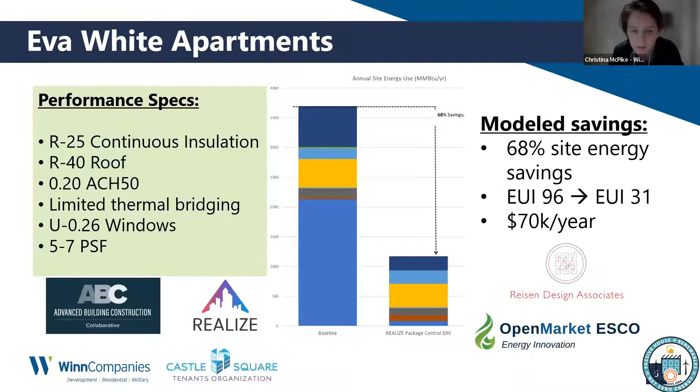This is Peterson Engineering, and all of our new distribution systems, i.e. the supply ductwork off of the ERVs and the refrigerant lines from the central VRF plant, we're going to drape over the existing face of the building and punch through the T's of the T-shaped windows, where they'll connect to new fan coil units inside the apartments and provide distributed fresh air through the central ERV systems up on the roof.

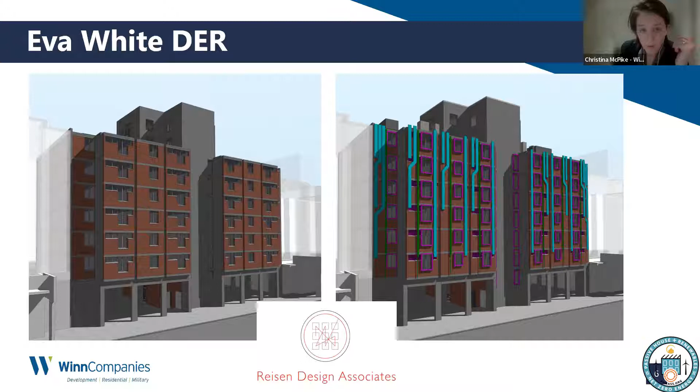So once all of this HVAC distribution is installed, we'll start hanging our panels. We selected a manufacturer called, that everyone will be familiar with, Tremco, of the Dryvit brand. This feels and kind of looks like EIFS.

These will be 8 foot tall by 13 foot wide, prefabbed panels fabricated in a shop in Indiana, shipped to the building, and mechanically fastened to the facade at the conveniently exposed concrete floor slabs on each level. And so that's going to completely enclose that mechanical distribution network behind it.

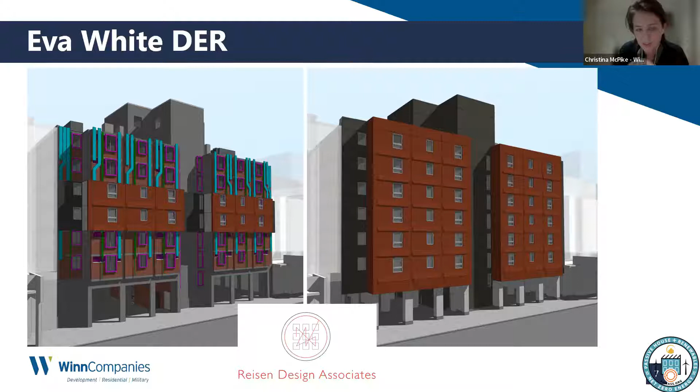The little pink boxes represent our fire stopping detail at the window openings. We'll also, just based on ISD and BFD feedback, be fire stopping at each floor slab as well to compartmentalize flame spread.

But a little bit more detail here, and we're a little further along in developing drawings. Like I said, we're working with Tremco. This is a new product that they've been working through R&D of for the last year or so. It's called the Revitalite system.

Our panel will be 6 inches thick. It has an internal framing system, and then it's basically coated with traditional EIFS finish. And like I said, mechanically fastened to the slab. The fastening system is a patent pending system, so I can't get into too many details on that.

The system itself, meaning the whole panel, the window within the panel, and even the panel-to-panel connection, it's important that we define it as a system — a system that is fully engineered and fully warranted as a system, rather than at a component level or as a kit of parts.

It's still going through performance testing. We do have the big one, which is NFPA 285, the fire test, but it is currently still going through air, water, and thermal testing, and some smaller fire testing, some little sisters of NFPA 285.

We're also having the very fun legalese conversations around warranty and insurance, which is all of our favorite parts of designing and constructing buildings. But when we're in the territory of hanging 800-pound panels on Tremont Street, it's a pretty important topic.

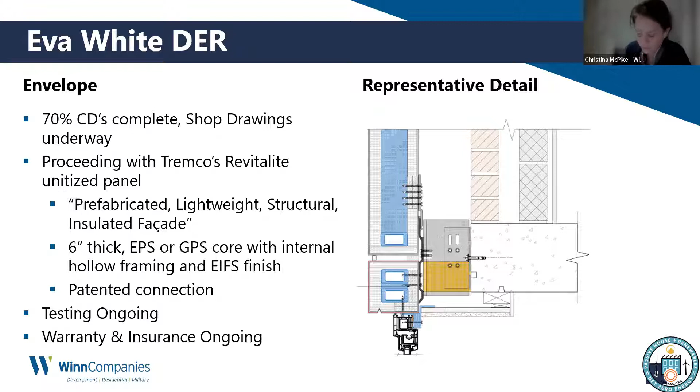HVAC I touched on, where it's all central systems now and master metered, with the exception of air conditioning, which is tenant-owned and provided window units. But it is master metered, including for electricity, which is pretty common in public housing. And that was important to maintain. So we had no intention of pushing utility costs onto residents, and for a variety of reasons, decided to stick with central systems.

So we have a central VRF plant, ERVs providing fresh air to every living room and bedroom.

We're able to reuse the existing exhaust ductwork, which is great. It'll all be cleaned and aero sealed, and there's some damper requirements required here and there, and tied into the new central ERVs.

And we're electrifying the hot water plant. So this will probably be our first Mitsubishi QAHV heat pump water heater, although not the only one in design development, given all of our passive house projects are specifying that these days.

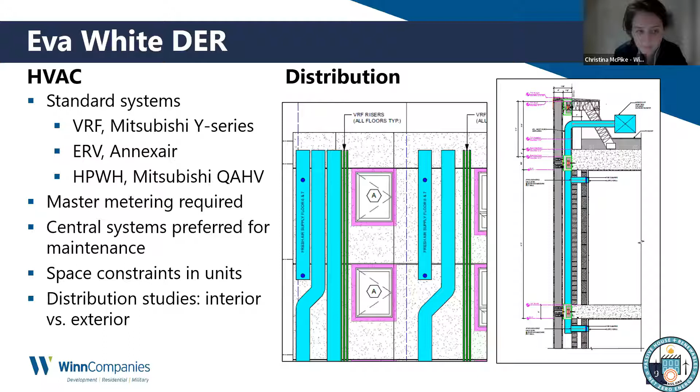The goal was always to keep residents in place, and we're planning on doing that. And in large part, that influenced the decision to stick with central systems.

It's an expensive retrofit. We're spending about $250K per unit. That's all in, meaning kitchens and bathrooms and non-energy work is included in that number. And it is a union project, but the deep energy retrofit cost alone is a little over $8 million. So it's not insignificant by any means, about $80K a unit.

We had to fill that gap with a variety of sources, but honestly, we were able to do that primarily with traditional housing subsidies, not necessarily special or new energy monies. That said, we did work hand in hand very closely with the LEAN program, with National Grid and Eversource, almost on a daily basis for 4 to 6 months, evaluating the project, the measures, evaluating our energy model, redoing our energy model, vetting our energy model, you name it. And the LEAN program is supporting the project with a significant incentive, which we're extremely grateful for.

For every extra dollar you spend on a LIHTC deal, the LIHTC equity goes up. So that's always a positive relationship.

And then most interestingly, because we're spending so much money, because the needs were so great at the building, which we could prove, we were able to qualify through a Section 18 path under the RAD program, which is in quotes, 'demolition and disposition of public housing.' This is a program that allows you to underwrite market rate rents in order to support larger and cheaper debt. And that's what we're able to do, and the deal can support it.

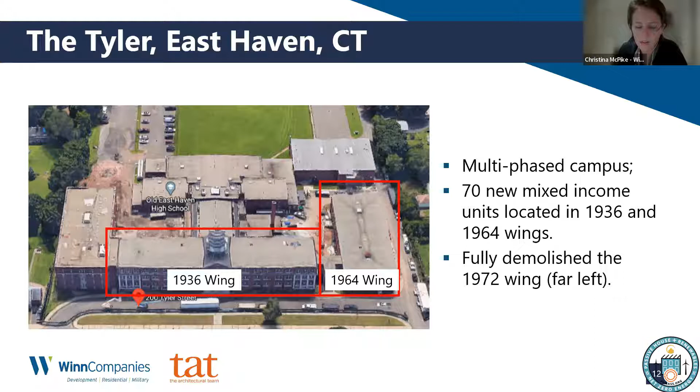We elected to pursue the EnerPHit program in direct response to Connecticut CHFA's QAP, which at the time had a total of 6 points, today it's 13 or 14. At the time it gave 3 points for Passive House; today it's 4 for Passive House, 3 more if you add LEED Platinum, another 3 if you're all electric with battery storage, and another 3 if you commit to commissioning, benchmarking, and broadband.

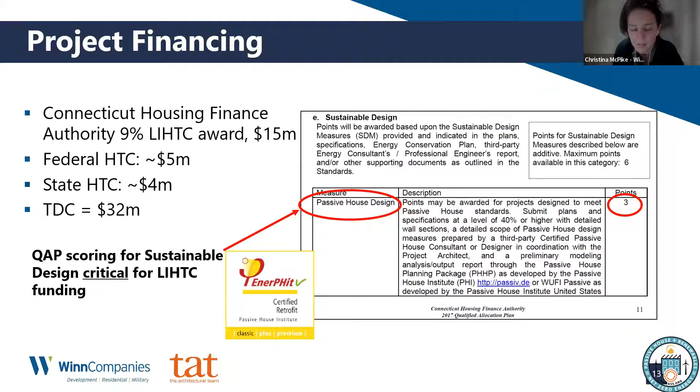But 5 years ago, this was the 2017 QAP, and we decided to propose EnerPHit as a compliance path. At the time we were kind of peeved, feeling these points would only be available for new construction projects and there's no way we could compete. But we had learned about the EnerPHit path, proposed it to CHFA, and they awarded us the points, which to this day we feel is the only reason the project got funded through the LIHTC program to begin with.

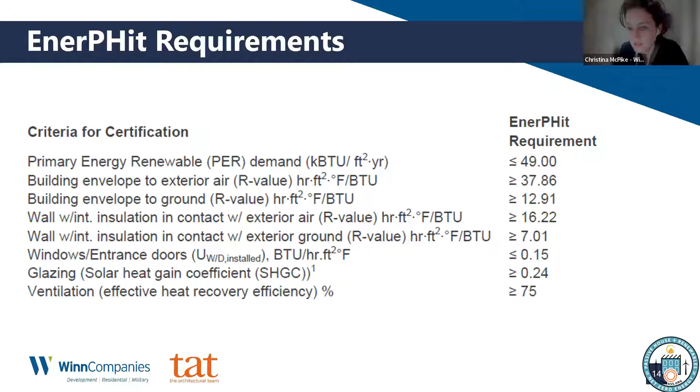So these are the EnerPHit performance requirements, not unlike PHIUS, although a little more forgiving. I want to admit these are from 2018, 2019 and may have changed. There's a maximum peak demand and infiltration requirements, plus some prescriptive requirements around ERV performance. So it's a mix of both performance and prescriptive requirements, and you can pick and choose your battles. Some are mandatory, no way around them, like the whole building blower door test results and the peak demand, but you can underperform with windows and walls as long as you still achieve the whole building energy demand.

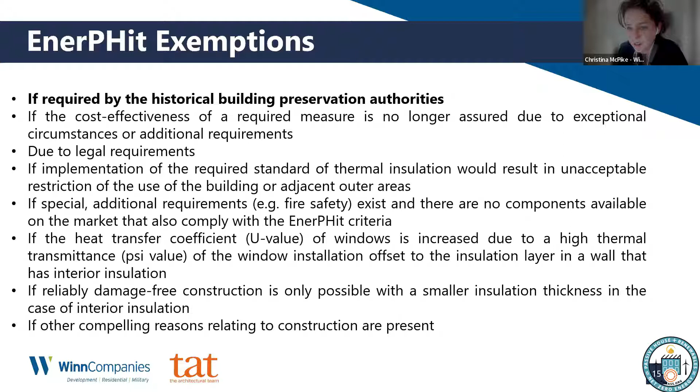EnerPHit is great as it has some specific exemptions. The first one bolded here applied to our project. They allow exemptions from those prescriptive requirements based on several factors, one of them being historic constraints, which we leaned on quite a bit.

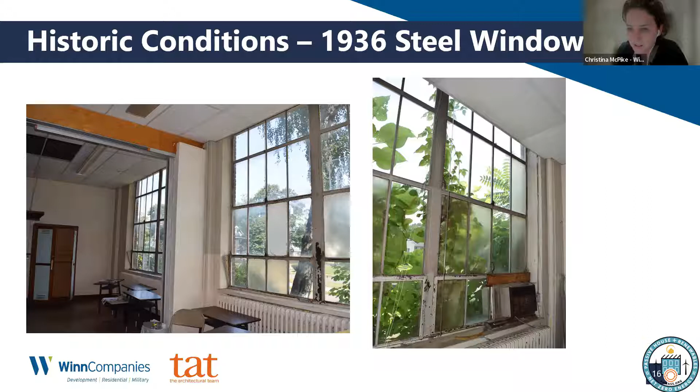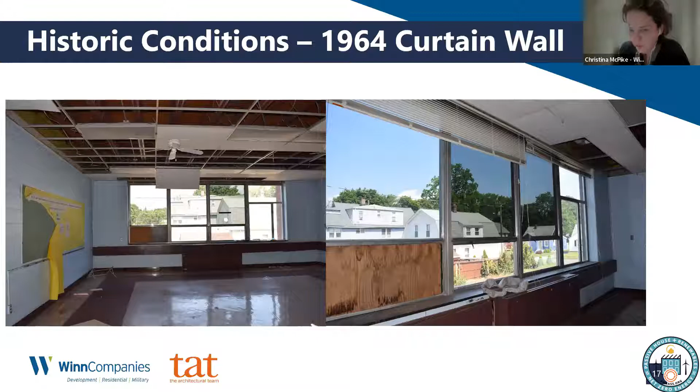Some photos here, this is in the 1936 wing. These are the original steel, single pane, really poor performing, massive windows, about 15 feet wide by 13 feet tall. In the 1964 wing are the historic curtain walls, yes they are technically historic, being over 50 years old. There really was not a lot of historic charm to preserve inside the building, the stairwells were about as far as the design aesthetic went, so we didn't have a lot to give SHPO, and whatever they could hold onto, sure heck bet they were going to.

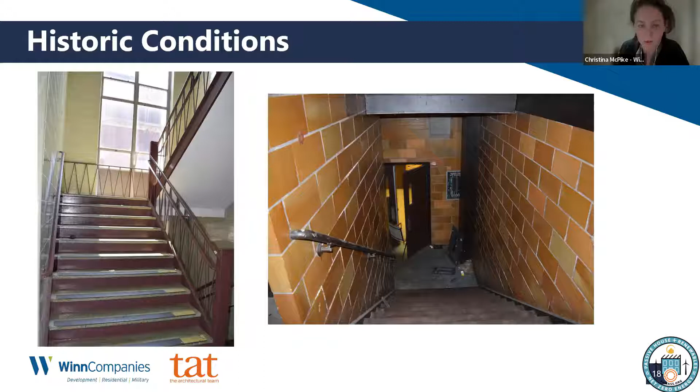Like Eva White, we applied to CHFA a couple of times, so we were able to compare the scope impact of deciding to go from our baseline historic adaptive reuse project to EnerPHit. It added, at the time, a 6% construction premium, 1.2 million. It didn't break the bank.

We wouldn't have normally insulated the living room walls at all, and that is SHPO and NPS preference—insulate your bedrooms where people are trying to sleep, but leave your living room walls exposed. We lucked out here because it's a school building; all of those walls were plastered over for the most part, not a paper mill with masonry.

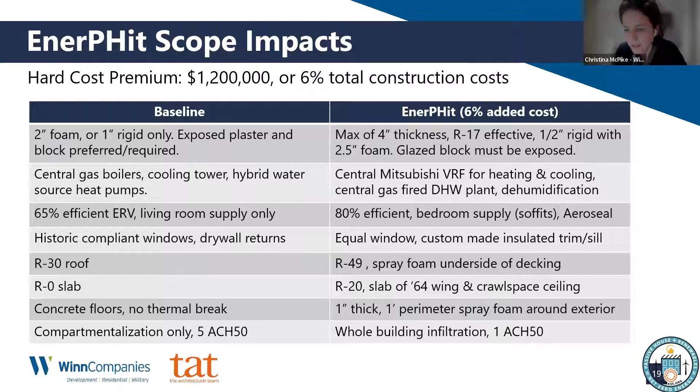I want to be cognizant of time and leave time for questions.

You're not supposed to be able to read these details. Steven Winter Associates was our consultant on the project, and we spent a lot of time with them reviewing details. Unlike a new construction project where we're pursuing Fitwel—sorry, PHIUS—certification...

We know how to design and detail that wall assembly, but we didn't know what was going to be behind the wall that we were knocking down in this school building until we knocked it down, and then saw that there was a big piece of steel behind it, and we needed to address that somehow. The somehow was usually spray foam, unfortunately, from an embodied carbon standpoint. But this image is just to say that it took a lot of back and forth, a lot of design review meetings, and quite a bit of field inspections and sort of pause-and-consult type days, where we uncovered some unknowns.

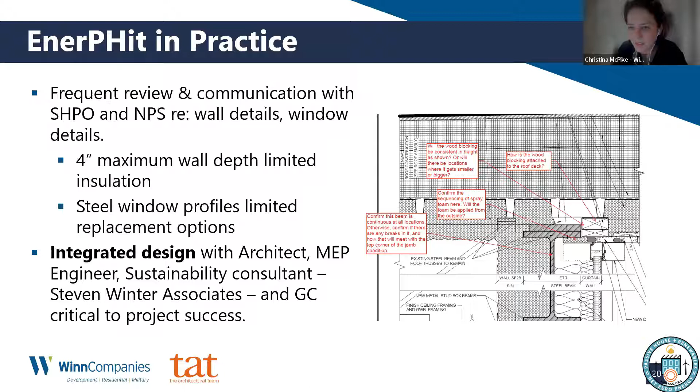Meaning everything feels somewhat customized. This image is just blurry, I apologize, but we had a custom windowsill and head and return product made because we had very narrow sight lines to play with, and we had to address the condensation risk at the concrete and block wall to aluminum window frame.

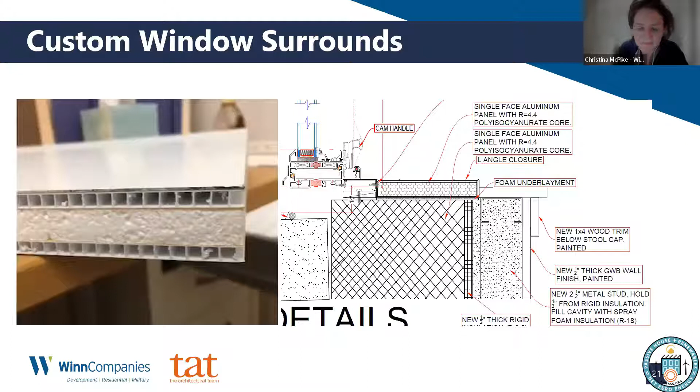So again, just kind of a unique attribute of the project. I should mention, I showed some pictures of the windows and the curtain wall earlier. Originally, we were told that we could not replace any of the windows in the building, and instead we had to refurbish them, which would have meant we had to sacrifice the EnerPHit standard and the points that we had been awarded by CHFA.

So we spent a lot of time working with SHPO, who was highly supportive of the project and really glad to learn about EnerPHit. We had to work with SHPO, which is the State Historic Preservation Office, to really advocate for the project to the National Park Service. And Steven Winter Associates was able to do a few analyses.

One of them here is a comfort analysis that basically proved we would have to maintain 85-degree air temperature to keep people comfortable and to avoid cold spots and issues in the apartments if we did not replace the windows and if we did not fur out the living room walls, because that was also kind of a fight. So it's sort of some neat technical tricks that we were able to use and just sort of have on hand as ammunition for the authorities that be.

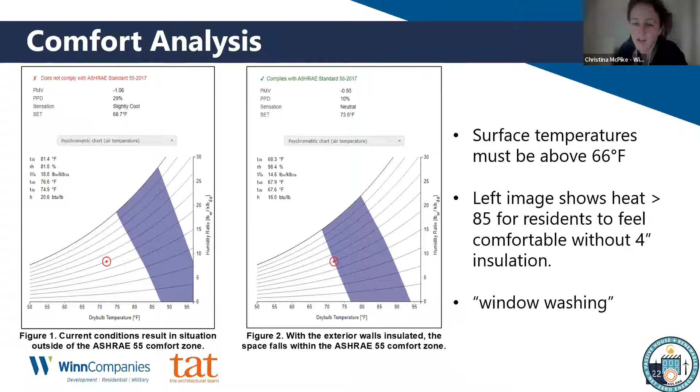Steven Winter provided a condensation analysis and did some thermal modeling of various conditions. Every floor is made of concrete, and all those concrete floors met our brick and block wall. So these were significant thermal bridges, the entire perimeter of every floor area on every level of the building.

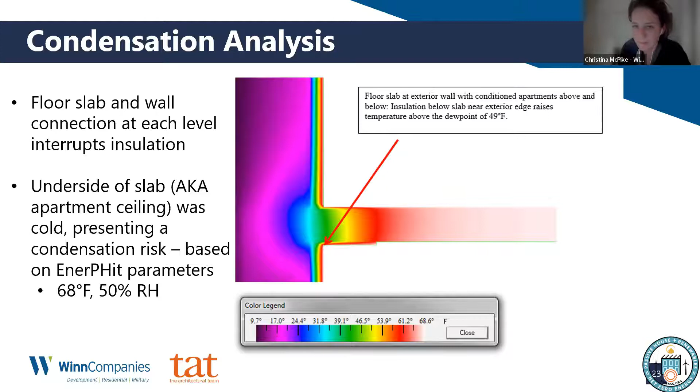Not great. We had to drop the ceiling right at those window openings in order to insulate, basically bring our exterior wall insulation up and over onto the ceiling about a foot, and go back and forth with SHPO and NPS to make sure it didn't interfere with sight lines from the exterior. Can you see your new drop ceiling from the window, and how far back does it need to go? We had to mock up that whole assembly detail for them to show and take pictures and verify it didn't cause issues.

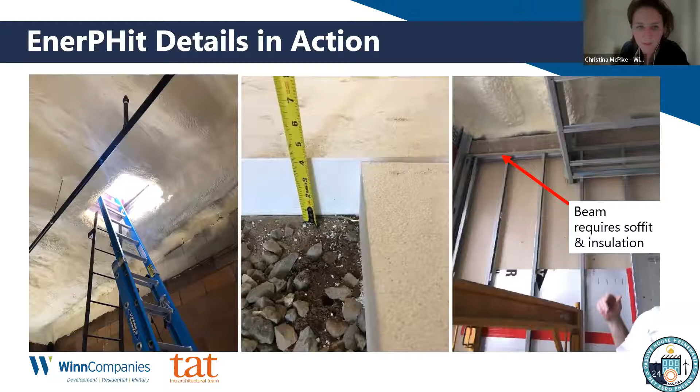I alluded to foam earlier, there's a lot of it in the building. Unfortunately it would be great if there were other solutions to avoid that, but we basically foamed every surface we could, and would often encounter details like this beam in the picture on the right during inspections that hadn't shown up on any drawings, and luckily was caught before it got framed over and nobody had insulated it properly.

Another beam there. All the pictures are pretty blurry, but the far right image shows how tight, and the amount we relied on foam to get those window returns tight against the very uneven concrete rough openings. The image on the left is an infiltration test, a duct blaster test tied to the new windows, which were really, really tight, and manufactured by Universal.

We were unable to get an alternative window to work on this one, and I'll get into that a little bit on the next case study. The windows were a really weak thermal point in the project.

We remediated that by window washing, I alluded to that earlier in the comfort analysis slide. We have all of our heat registers almost pointing at that outside wall in order to wash over them with warm air. That's just because our aluminum windows are not a good window. That's something we had to spend a lot of time with PHI reviewing as well, and we just felt like there was no way around it with the dimensions of the existing steel windows I showed you before.

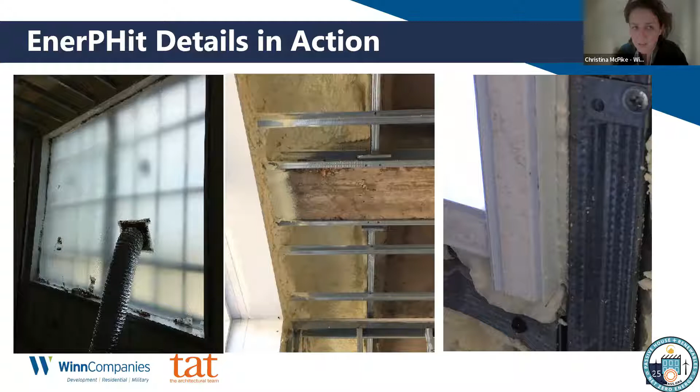The 90 kW solar array up on the roof. That's pretty nice.

So I put the final results here. We were targeting 1 ACH50, came in at 1.16.

Because of COVID we couldn't get the curtain walls on the 1964 wing, they were 6 months delayed. So we decided to do a split CO and finish the 36 wing before the 64 wing, which might make you wonder how you did a whole building test if half of your building didn't have windows in it, which is a great question. And I like to think that's why we ultimately failed.

It wasn't really a failure, but we just had air communicating between the two wings because they were never separated, never supposed to be separated. There's a big lobby and corridors on every level connecting them. So we built a temporary wall the best we could. I still have foam stained shirts from the weekend I spent crawling around in drop ceilings trying to fill the gaps of our mediocre temporary wall.

But we did two partial whole building tests. We tested the 36 wing and then the 64 wing. We tried to show that the infiltration was really not exfiltration and just communicating between the buildings, but I think we're about to give up on that argument. It was just too difficult to verify. But the team tried really hard and we're proud of the outcome anyway, and really confident that we're not losing conditioned air through the exterior envelope.

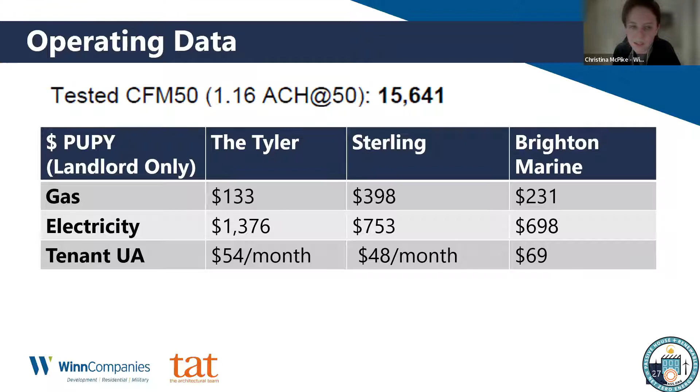And Peterson was a huge help in helping our team get there. Okay, so the last project I want to present is Stone Mill. I see this as the Tyler 2.0, obviously another historic adaptive reuse project. This building is in Lawrence, Massachusetts, a beautiful historic mill constructed in 1845, 150,000 square feet, largely vacant today. We're converting it to 86 apartments, mixed income, workforce 60% and 30% AMI, and we've committed to an all-electric building with no fossil fuels. The main difference from the Tyler is being electric for domestic hot water and heat pumps on the ERVs rather than gas.

We're just in early design now. The project was funded by DHCD last fall, and we submitted with this scope of work. We started really aggressive from day one. We wanted to do that for a variety of reasons. We knew we could do an even better job than what we were able to accomplish in East Haven. We were responding to the Columbia Gas explosions that really devastated the Merrimack Valley, and also to resources made available through the Massachusetts Department of Energy Resources.

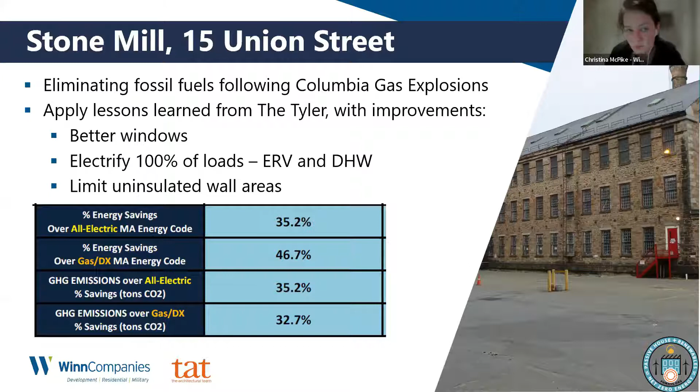So with that in mind, we set out developing the scope of work here, and we knew we needed to maximize insulation. We knew we needed a better window than we used at the Tyler, and we're a little nervous about our operating expenses, but we're underwriting a very conservative budget for those. These percentages show the modeled savings over a baseline, holding most things equal except for HVAC, comparing our VRF ERV system to something like a PTAC system, for example - significant savings over a baseline condition. So all-electric heating, cooling, ventilation, and domestic hot water.

We're using a simulated double-hung window, so it looks like a double-hung window when closed, which it needs to for SHPO and MHC. But we're hoping we'll have a much tighter air seal than a hung window would - we'll get into some of the installation details. We'll have connected devices for better demand management. We're setting the same 1 ACH 50 target as EnerPHit. We're not formally calling this an EnerPHit project and we're not planning on certifying, but we basically used all the performance requirements of that program to establish the performance spec for the Stone Mill.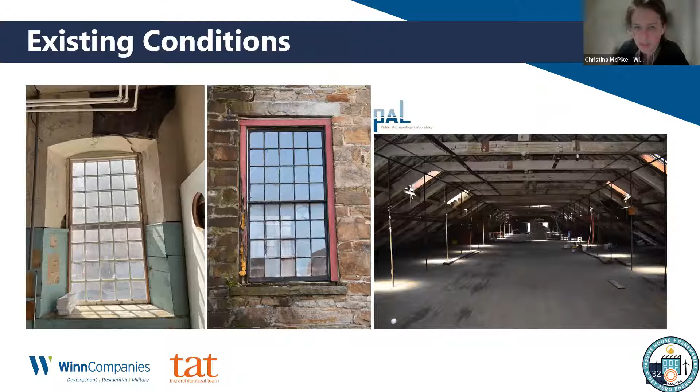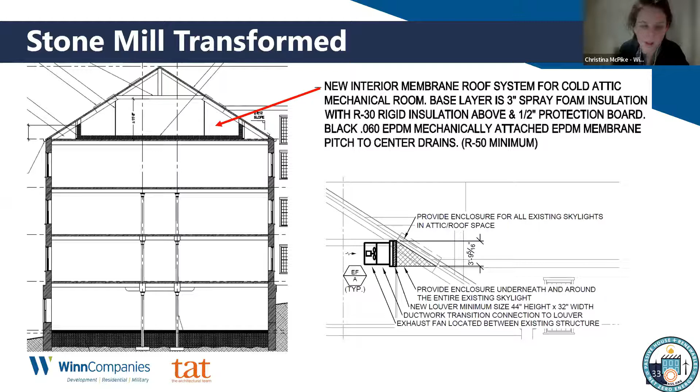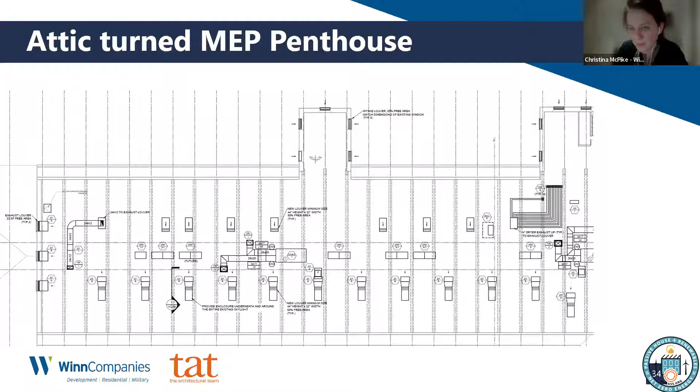There's a massive attic up on the top level, which we thought was pretty clever to use as a mechanical penthouse. The original scope of work submitted to DHCD, which has been funded and that we're now redesigning, showed we're basically building a roof inside the attic, making that attic an outdoor space and putting all our mechanical equipment in that space, which means a lot of fan power and requires mechanical louvers throughout that roof line, having a pretty big energy hit. Also a very expensive structural scope of work - there's I don't know how many tons of equipment, but a lot, and the structural reinforcement is extensive. We're also not sure how we'd ever maintain and replace this equipment 10, 15 years from now.

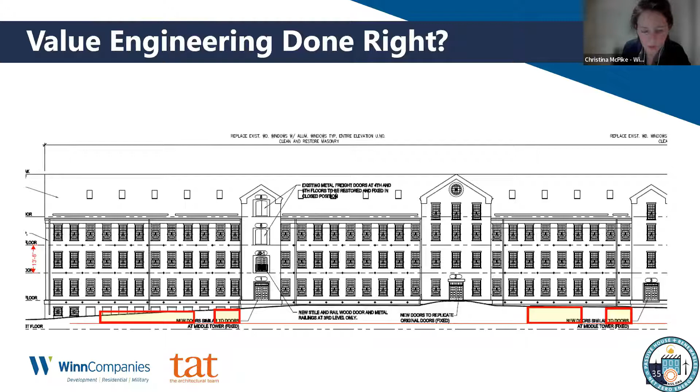So over just the last two weeks, we've been working with the mechanical engineer, R.W. Sullivan, to try to locate all that equipment at grade instead. We originally weren't doing that because this building is in a floodplain, a 100-year floodplain, and historic preservation doesn't usually like to see mechanical equipment at grade. But we are solving for that - we're introducing new areaways on the rear side of the building and hopefully relocating all of that equipment to that space, and taking what may have been future commercial tenant fit-out opportunities and making those into mechanical rooms.

We think it's going to save a lot of money on first cost, but also operational cost, because we eliminated something like 60 makeup air fans and louvers up in that attic space.

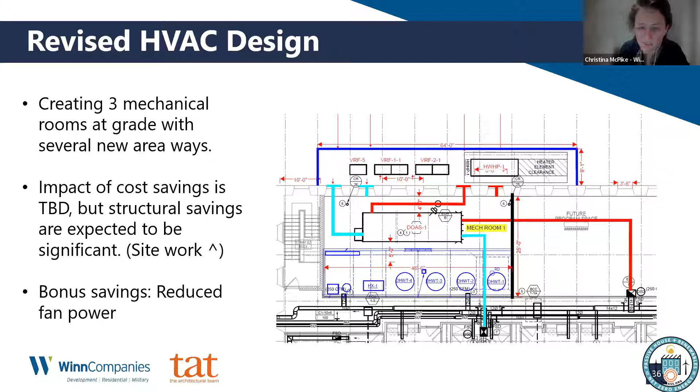Our wall looks different than the Tyler. You probably noticed all of that metal breaking up our foam on the Tyler. Probably two wrongs don't make a right. At the Stone Mill, everything will be wood studs on the flat, so we're trying to really maximize the R value we can get out of the exterior wall assembly.

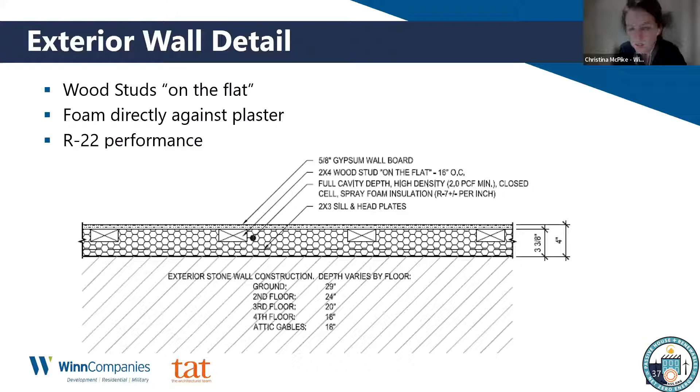We had to make a case to historic to allow us to insulate all of the exterior walls. Originally, the construction team assumed that all of our living room walls would be exposed, and we'd just power wash and paint them. Instead, all of the walls will be furred out. They'll all grow 4 inches in depth and receive spray foam insulation between all the wood studs. We're also not holding it off the existing wall with rigid insulation. In this case, it'll all be foam.

We've been working extensively to get everybody on board with a window replacement. We just released a mock-up window to be fabricated. Hopefully we'll have that installed in a few weeks and be able to get pictures and prove that it is good enough and close enough to the original windows.

We thought we'd found the original windows, and all the windows in the picture were original. We had a very sophisticated window survey consultant come out, an expert in this particular vintage of building stock, and he found that all of the windows we thought were original were not - they were installed at some point in the early 1900s. Still historic, but not historic enough.

We found 3 original windows in the building, and every new window needs to match those original windows. These are minor differences - I'm convinced no untrained eye would ever notice a difference, but lots of people do notice the difference.

So we're working with a window manufacturer called Peerless to manufacture the window. It's still aluminum, not a triple glazed window. We floated the idea by historic. There's just no way we can meet the dimensions of the window with a UPVC product, and we've been talking to Marvin about an aluminum clad wood window - the performance is over U.30.

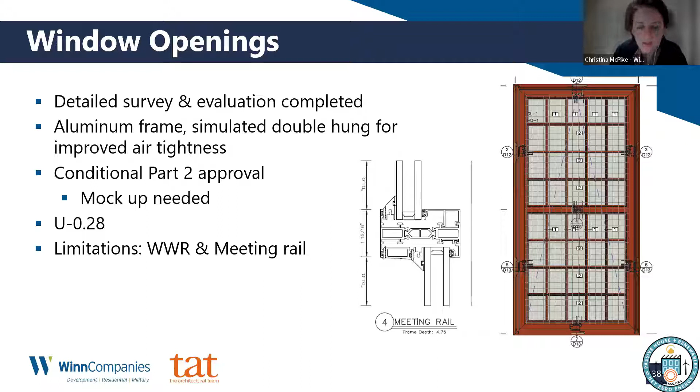So we're sticking with Peerless, and I'm excited about finding this manufacturer. We've never worked with them before, but the whole window will act as a hopper and sort of push out, so it'll be a really nice airtight closed assembly, which is going to be important for us to achieve the 1 ACH.

New Ecology is the sustainability consultant for the project. We received some early funding support from LISC to engage R.W. Sullivan on energy modeling and New Ecology on some technical consulting, which was huge and allowed us to very quickly conceptualize the scope of work for our LIHTC application before getting too far ahead and going down the wrong road or path.

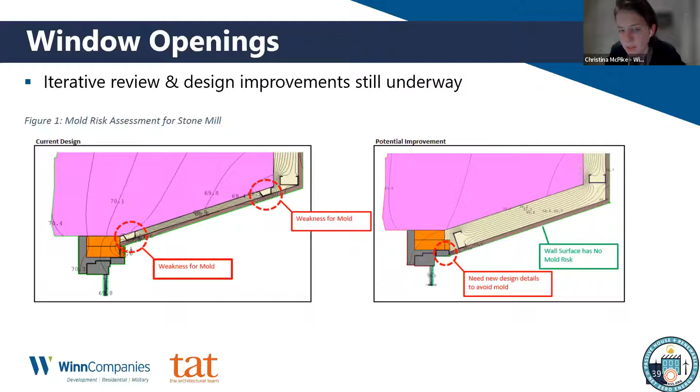This is just a detail similar to what we saw Steven Winter do at Tyler. New Ecology caught this, which is our window head, and identified it as a mold risk due to condensation, so we're working on beefing up the R value of that particular section of all the walls.

I mentioned the floodplain earlier, so we're raising the whole ground level by 8 inches anyway, and so it's a great way to introduce 6 inches of new rigid insulation instead of just fill and concrete.

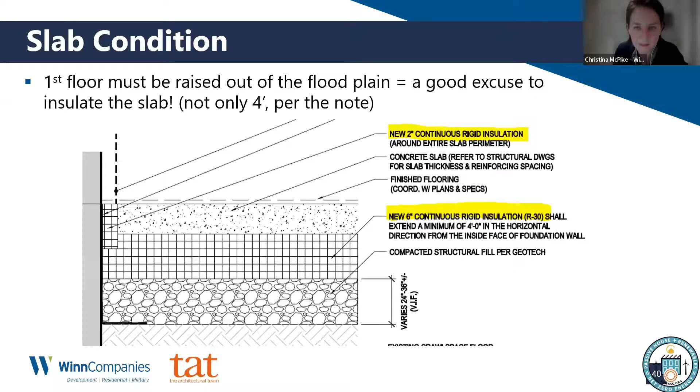So that's it for my slides, and excited to transition into Q&A. Thank you.